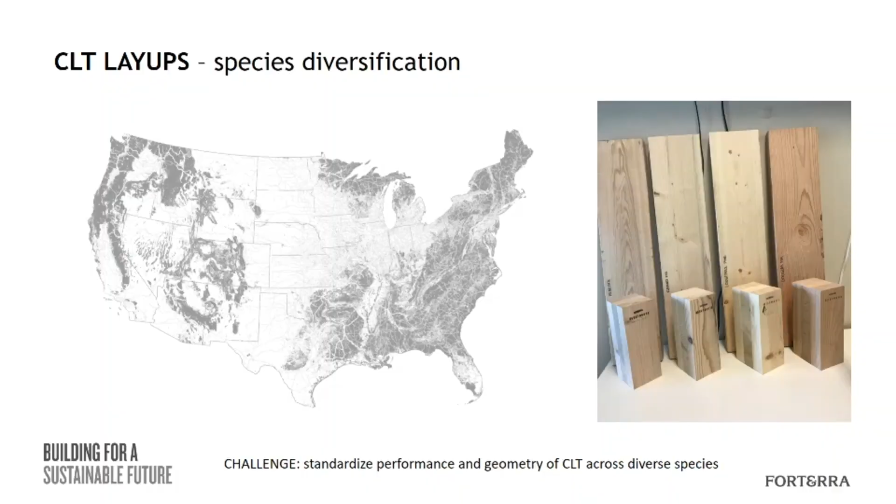Derek and others presented a little bit about this. It was mentioned a few times today. One of our opportunities, but also our challenges in the U.S. and in the Pacific Northwest, is our diversity of species. This is really evident when we go to Europe. We have a group, a lab in Graz, Austria, where CLT was really developed, along with other industry and academic partners over there. They have one species. They're starting to branch into other species as we get into Scandinavia and so forth. But really, European spruce is the baseline.

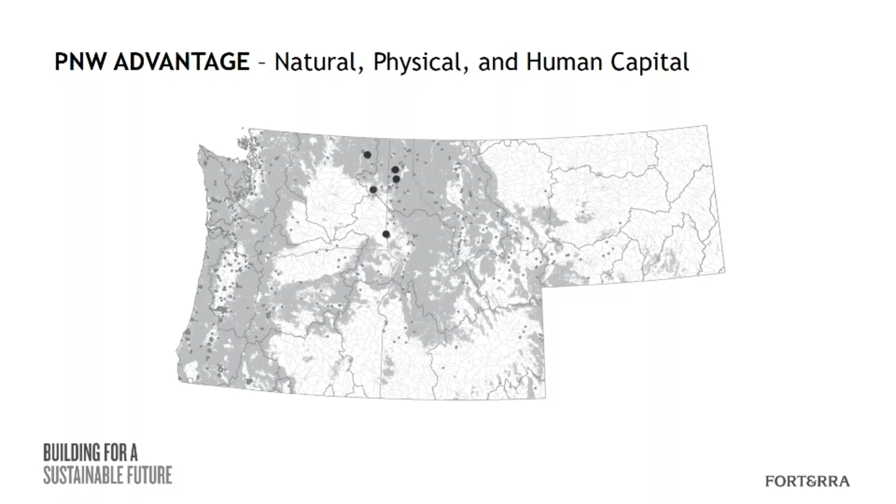Here, we have 4 or 5 primary species around our area that we're focused on collectively developing. And so I'm gonna present this as the 4-state region. A lot of this work comes from biofuels research and development, public-private research and development, WSU and UW, where we looked at supply chains, and it really takes a capital approach: we have the natural capital, we have the physical capital, the infrastructure, rail, road, mills, so forth. Of course, I agree with Russ's argument that's an area of focus, and that's what this presentation is about. And we have the human capital.

We have the ability to span the entire spectrum from the forest all the way to a lot of this audience in the architecture, engineering, and construction world. The 5 black dots there represent the economic capital. These are recent investments by mills, and of course 2 CLT facilities now. And there could be other dots on there, of course, SmartLam in Western Montana, and when we get into Oregon, we could talk about D.R. Johnson and so forth. But a focus on the inland Northwest,

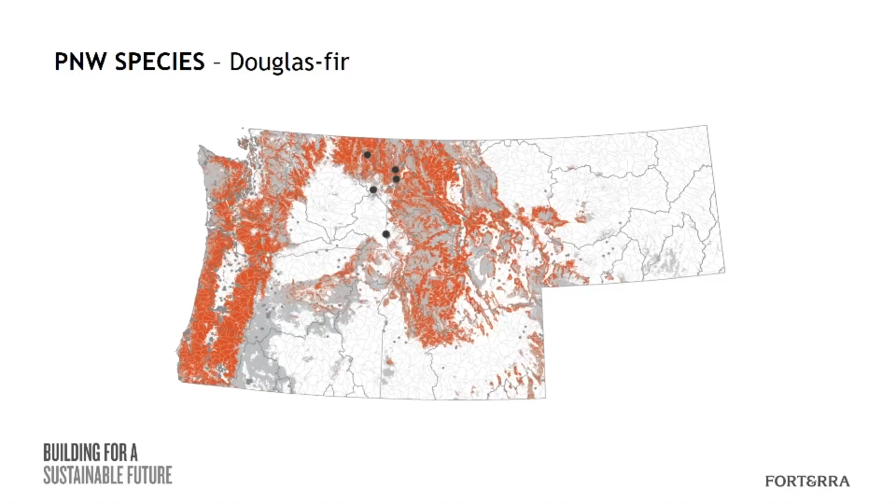looking across where these species exist, Douglas fir, Western hemlock, lodgepole pine, grand fir, and ponderosa, and you'll notice that these are tied. I think it's important we represent this. I really love the work of DNR in bringing us to the 4-digit and 10-digit watersheds. I think this is a great way for us to kind of ground our strategy.

So the question is then how? How do you accommodate all those different species? We heard earlier from the AEC side that's a challenge. When I started my career as a structural engineer in Seattle, these were early days for SIPs panels. And there were 3 manufacturers, and there's no standardization across them, and you had to pick a catalog day one and say, I'm going with that manufacturer, and try to understand and carry it through the project.

The shift to a different manufacturer would have been impossible. So let's get down to the LAMSTOCK size and talk a little bit about the standardization. In the U.S., Erica mentioned it earlier, we do have a standardization based on what's available: 2x6 primarily, lumber, dimensional lumber.

And be very specific here. By definition, lumber means something that is used in an axial or bending application: joists, studs, so forth. So I use the term LAMSTOCK, and Russ has publicly scolded me many times to be careful about using that term, but I think it demands a little bit of definition, that we use our terminology correctly. So in the lumber industry, LAMSTOCK is a grade, and I hope that's what you mean by that, Russ.

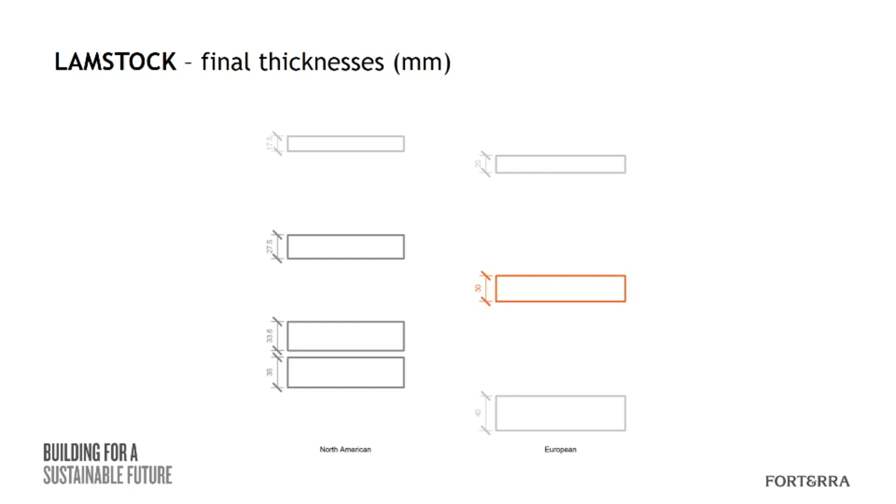And these are the final sizes in metric. So we have this available to us, but in terms of an actual commodity, it's a 2x6 for the most part for us. In Europe, a mill might have 90 different SKUs, to go to different products, to furniture, and so forth. And so Europe's a good lesson for us to look at. Over the last 20 years, they also started with many different sizes. I heard a comment earlier, that is a good thing.

We have niche projects where it makes sense at the engineering and architecture level to try to optimize, create custom layups and so forth. But they in the last 5 years are now leading towards a standardization on 20, 30, and 40 millimeters. And so you look at that, why, when the mills can make anything, why does it make sense that 30 is now the new baseline in Europe?

So let's just take that as a proposal to start here, that if we're going to create right-sized mills that are focused on creating LAMSTOCK primarily, not necessarily feeding into the commodity lumber market, it's not exclusive, but let's just take that approach. Then we start to look at, in addition to thickness, starting out with a standard 6-inch size, but also then making widths that are appropriate for glulam manufacturing.

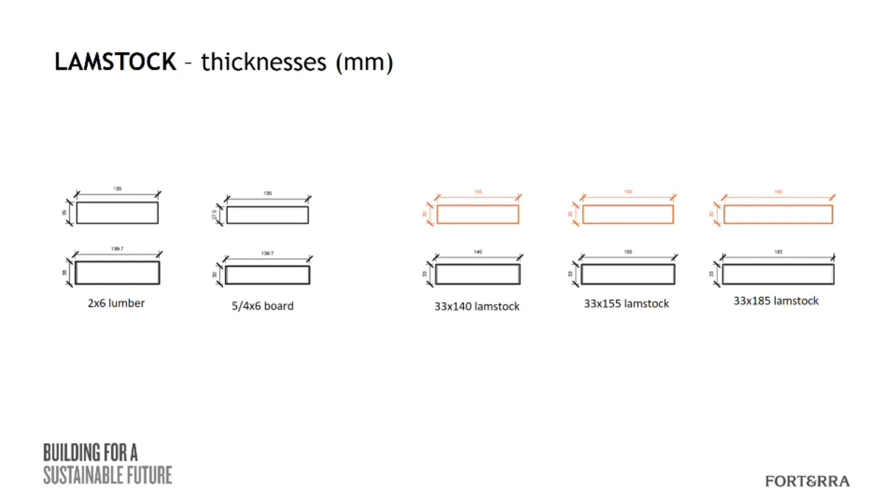And the architects and engineers in the room, of course, know that as we look at charring rates and so forth, especially as we get into the 2-hour typologies, the sizes can get very big quickly, 12, 14, 18 inches wide. So looking at that, here's the way we do it in the US. We have a product standard, PRG 320, and of course we have many champions in the room that have helped develop that standard.

But we've also done ourselves a little bit of a disservice, in my opinion, in the sense that that standard was developed 10, 15 years ago, primarily out of Canadian need and support to find a market for beetle kill. So it definitely was proposed under the strategy, find new markets for lumber. And so in that, we've created a little bit of unintentional bias by saying the basic layups are going to be 2x6s. And if you're going to do something different, it's called custom.

So the way we qualify is by species first. We might have 2 or 3 different sizes that we could put together in different combinations. We could have 3 or 4 or more different grades, a visual number 2, a visual number 3, mechanically graded, and so forth. And then we have, typically, 3, 5, 7, 9 layers. So when you start to play that out, it's upwards of 240 if you really wanted to provide all those different layups. And the qualification process can be very costly and restrictive for manufacturers.

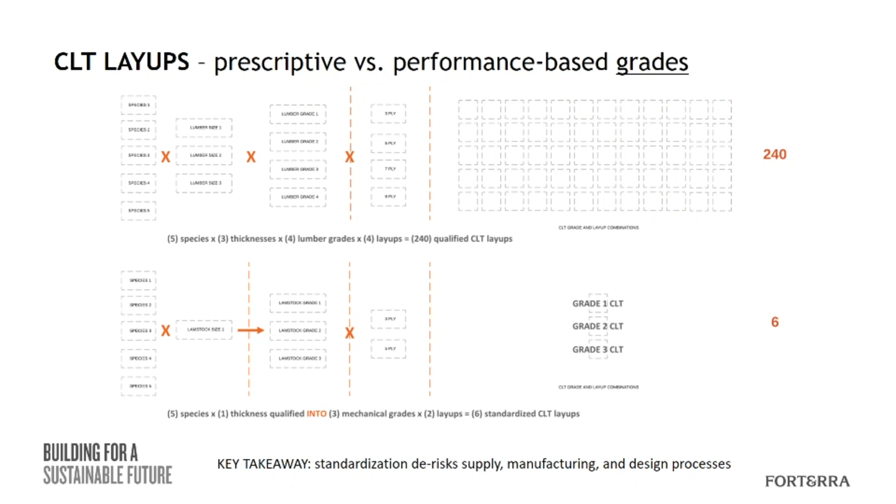And in this case, I'm taking one step further and saying one size. Let's start and focus on one size and start to expand that out over time. But in that, what we're saying is, if we have the ability to mechanically grade this LAMSTOCK, now we qualify into those mechanical grades by species, by mill. We're lowering that bar so that a lumber mill, a LAMSTOCK mill, could qualify into the standardized process.

So with that, it shifts the optimization, and structural engineers hate this, and I am an engineer, because it takes away their tool of laying up and optimizing at the material scale. It doesn't eliminate that. We're always going to do that, of course. But if 10 or 20% of the projects are niche, big, institutional, 12-story type projects, that's different than being able to drive down into affordable housing and provide a competitive material that will now compete in cost with light frame wood.

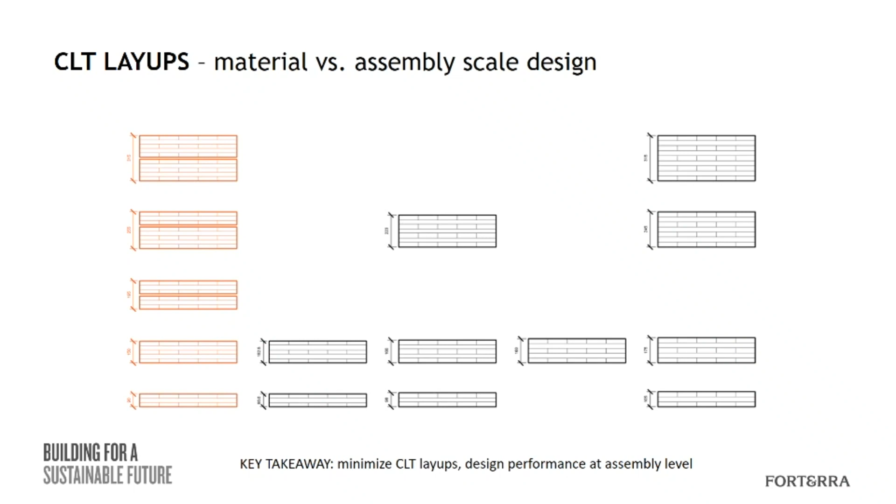So it doesn't take away the need to pull the moment of inertia lever, or the material lever, but we're now doing it at the assembly scale and allowing for different combinations of these 3 and 5 ply. And this is what it looks like. We still can use this in traditional CLT with gypcrete applications, or we can look at more complex assemblies of components. And it also creates the opportunity, as we get more modular with CLT, to deal with two volumetric boxes coming together, either as double floors or double walls, which also has acoustic and vibration benefits.

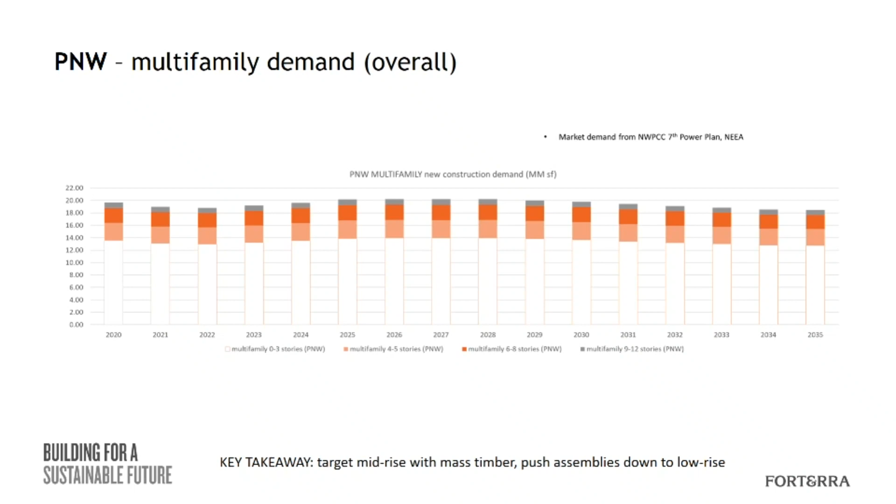Okay, so let's go to the markets and say where and how are we going to apply this? What is the need? A great study sponsored by Forterra, also building off of other WSU work, looked at the markets in the Pacific Northwest, those 4 states. And this is focused on multifamily. So 0 to 3 stories, 4 and 5, I broke this up as relevant to the new building types. We obviously do a lot of low-rise, single family, duplexes. There's a need for 3-story garden buildings. But we're focused on those new typologies, those 4 to 8-story primarily for CLT.

We're in a great position in Washington. The codes were talked about earlier, but it's not just the structural building code. We have a target, a reach energy code. Like California, our code is put out to advance the industry. We have a state mandate to reach certain energy efficiency and carbon goals by 2030, and this is part of that mandate to implement an advanced energy code and structural code.

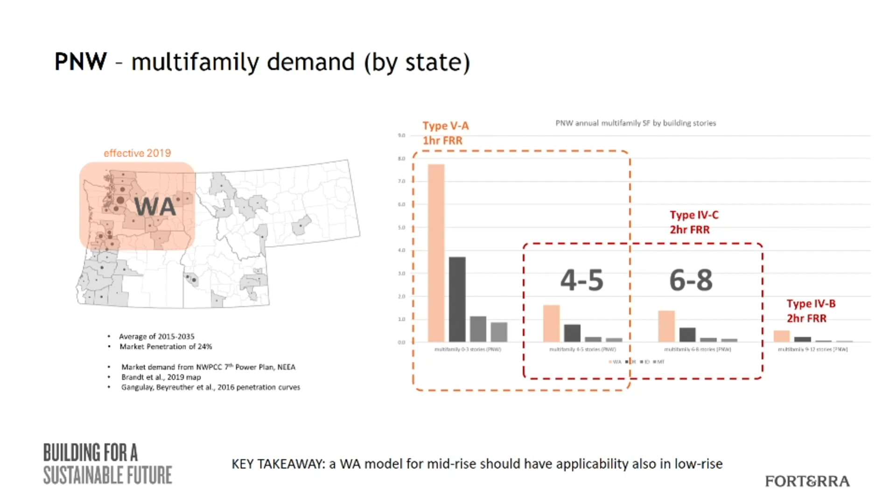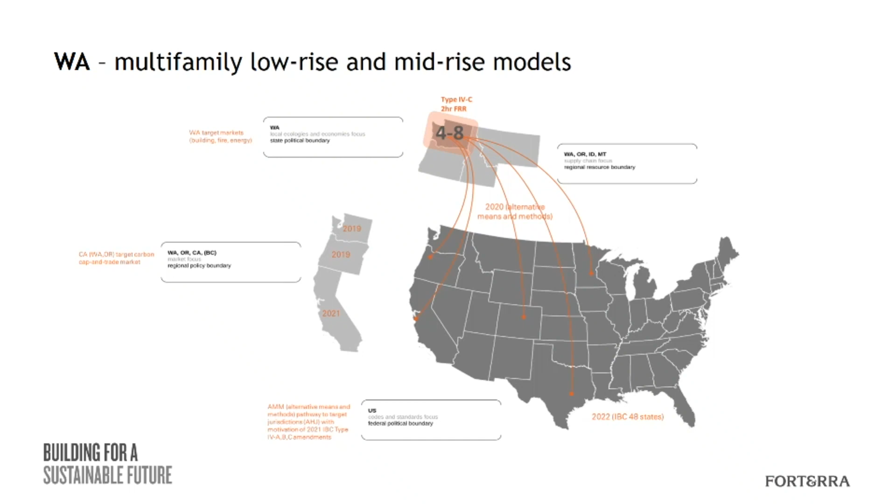So we're very used to doing type 5A construction, 1-hour fire ratings, up to 5, 6 stories, 5 stories over 1, podium projects. The proposal would be, let's develop the 6 to 8, the 12-story typology, and then as appropriate, as competitive, drive those assemblies down into more of our low-rise. If we're going to develop the automatic transmission, let's see how many vehicles we can push that down to replace the standard. We're in the position with Washington, Oregon, now Utah, Denver. But this model also eases alternative means and methods in other jurisdictions.

So this is what I already referenced with the building code and the energy code. Okay, now I'm going to just touch on this because this was really valuable work done by Indroneil Ganguly from UW with Forterra, Heartland and WSU. These were models we developed a few years ago for diffusion, available for download from Forterra. We're trying to look at the assembly scale on market diffusion. So we have to establish a model that is based on risk.

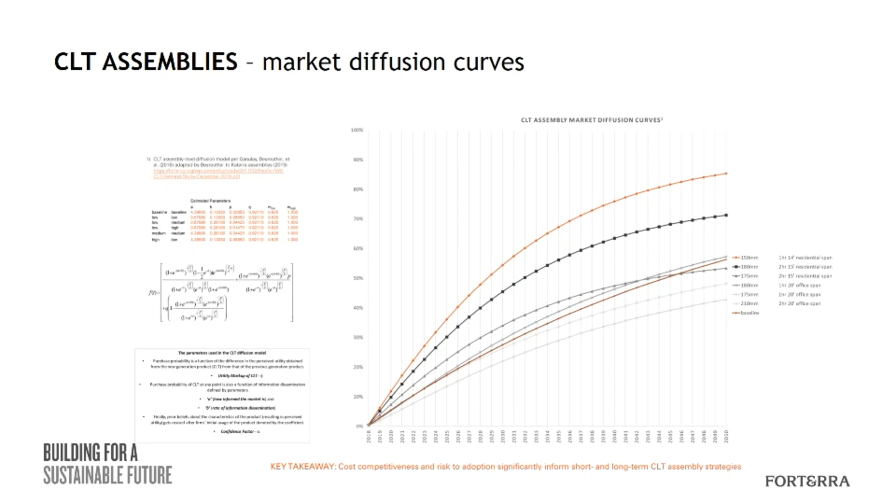And there are 2 main risk categories: risk of code and jurisdiction adoption, and risk of design and engineering, meaning is it a heavier lift if we have to go alternative means and methods, if we have complex timber and composites at 30 feet or so forth. And then the third factor is cost. If we can't be cost competitive, we're gonna slow down, decelerate that market diffusion.

Okay, so what you're simply looking at here is what displacement in a given competitive area, could we displace, whether it's a certain floor type, so forth. Okay, but this is more important. So when we look at applying that now to our needs in the Pacific Northwest, we look at how many square feet, 13 million square feet of low-rise building we need to build annually over the next 20 years.

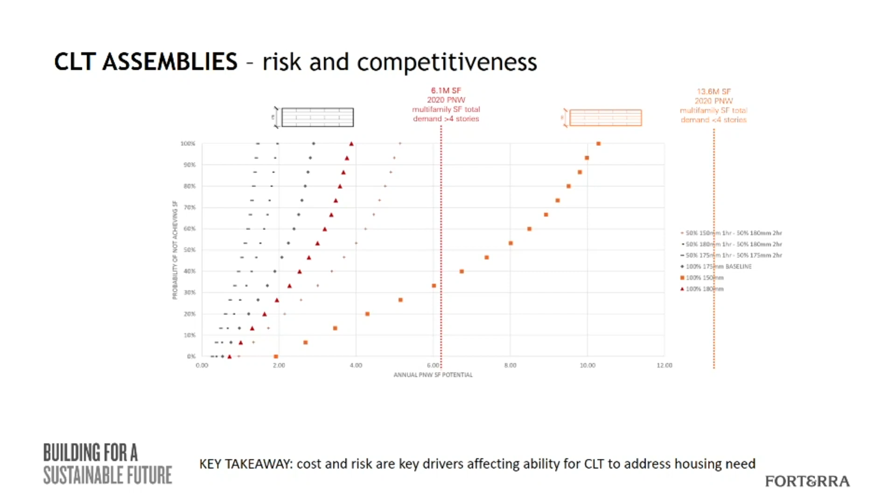Same here. This is that greater than 4, that 4 to 12 category right here. And then we look at our ability to actually move that into the market. It'll take 20 years before we're reaching that saturation. So now as a manufacturer, we pay obviously close attention to that. If our capacity is right here, we've got to figure a way to pull these over and fill those factories, right? That's one way to look at it.

But the other way to look at it is to try to use this to make strategic decisions about the specification of the wood. So this is really a proposal to architects and engineers that hold the power of specification to now drive a standardization into the market. Okay, so let's quickly say, well, does it work?

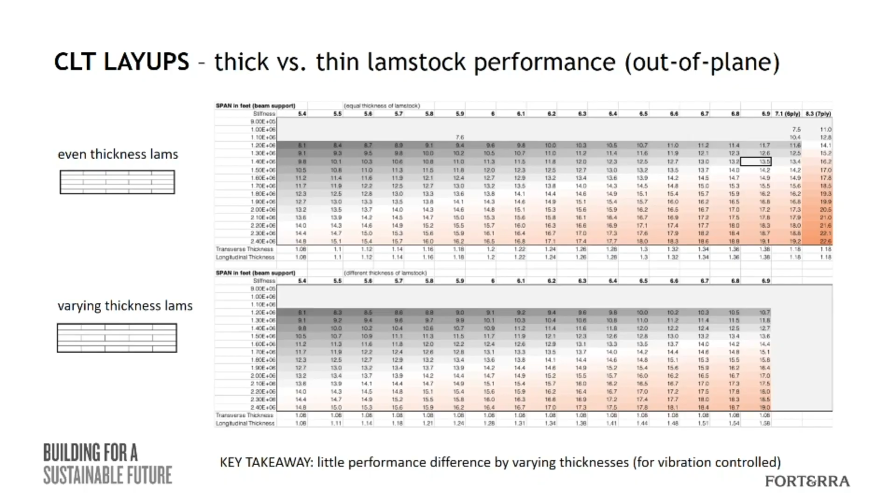These are our span tables, a little sensitivity analysis as an example of different material properties, stiffnesses on this side, and different thicknesses. And the comparison is, should we have even layups or should we have uneven layups? There are a lot of advantages to make those flanges bigger on the extreme fiber, right? That's the kind of general sense. But when we start to look at complex vibration models, we start to see the pattern here. A typical thick 5-ply, just follow the white down. You can manipulate the material lever or you can manipulate the section modulus.

And the recommendation is there is an optimization at a thin 5-ply for these low-rise models for 1 hour fire ratings. There is an optimization at a 6 or 7-ply if you were to standardize on that 30 millimeters. So another important performance factor is in-plane. So as we start to use this in shear walls, so forth, are we really competitive, and do we really understand the probabilistic performance of that wall?

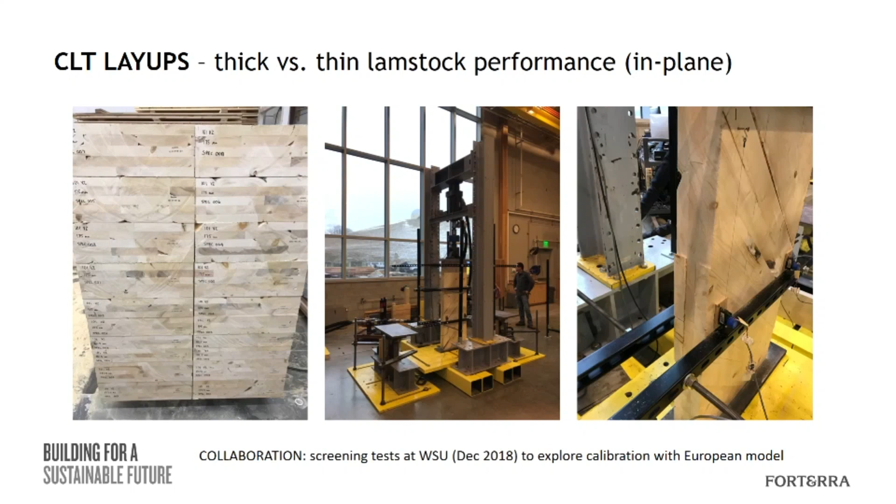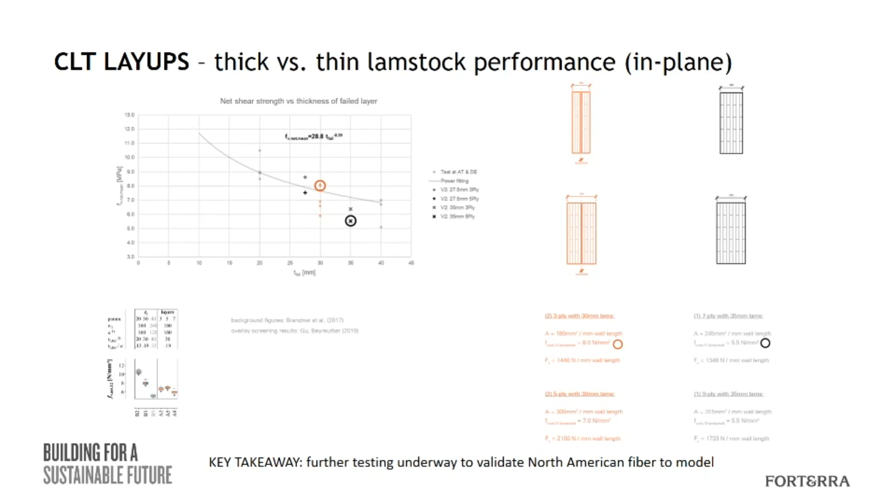So we did some screening tests along with WSU about a year or so ago, to correlate or to test against a European model that's been developed to say thin lams have a higher shear stress capacity versus a thick lam. And so these are our test results, the plus and the X, versus the power curve based off of 20, 30, and 40 millimeters.

So I'm going to conclude with what? So lumber mills understand how to do optimization. I don't need to tell them how to cut a circle into rectangles. But where it is cut actually does affect the performance and where we put that in CLT. So this is the common ground. We need to bring these two things together to understand what that specification is.

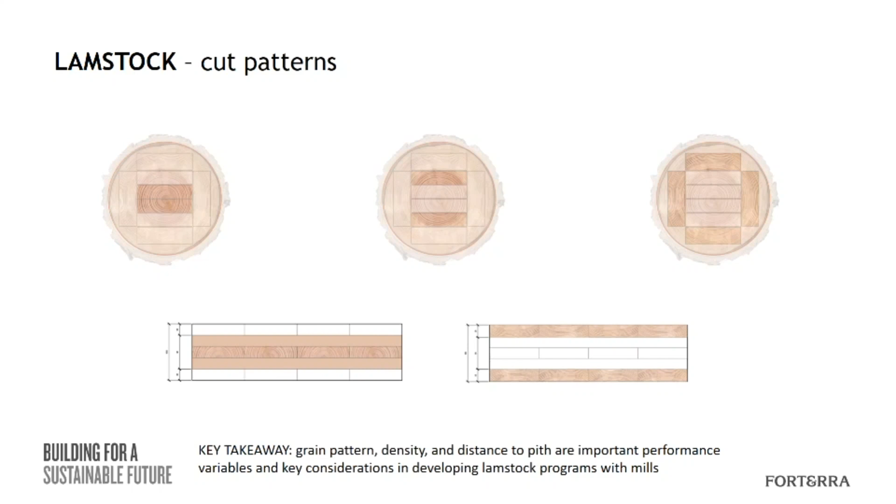And the key takeaway here is that in order for a mill to cut to a custom specification, we can commit to that entire center, that cant of that log if necessary, and utilize that fiber only and allow other markets to exist on the edge fiber. I won't get into that too deeply right now, but it doesn't exclude, obviously, mills participating with current 2-by capacity and being able to have additional recovery options for those products.

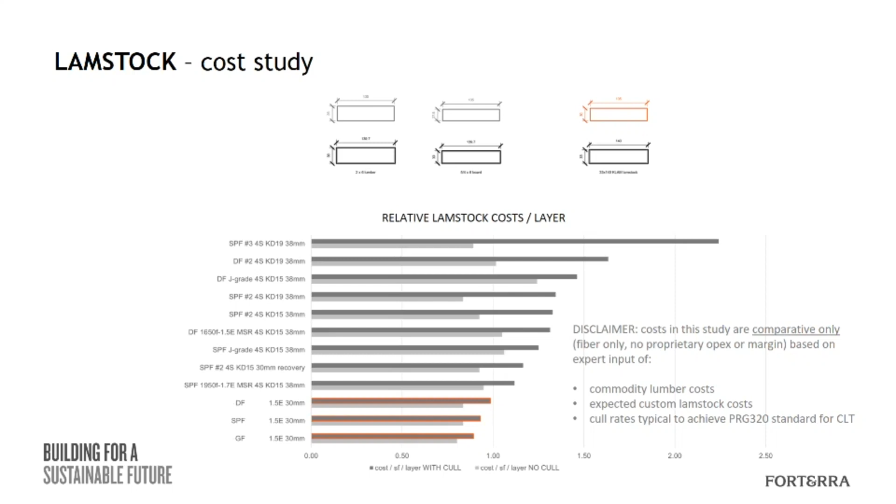And then ultimately, this is the takeaway, is that we have a few different levers. It's not just the cost of the fiber, it's also minimizing the cull rate, the amount that we throw away. So while you might be able to buy a lower value product, your actual cost will get driven way up if you throw away half of it. So paying for quality fiber, adding more value to that, and having lower cull rates is really the takeaway. So with that, thank you.